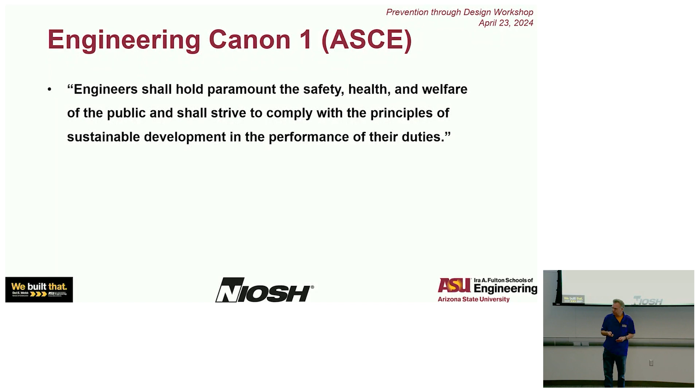If I go back to my title, canned corn, what the heck does canned corn have to do with safety? Well, here we go. Sorry. Hierarchy of control. This relates more to the foundational aspects of the environment and how engineering controls are certainly preferable to administrative controls.

Again, I'm going to use your example, Ed, on the parapet height on top of this building. It's a lot more difficult given the vagaries of human behavior, as we like to talk about it, to say, well, stay away from that 31-inch parapet, rather than building it high enough so that regardless if you're having a good day or a bad day, you're not going to fall over it.

It makes sense, but even the best efforts are sometimes not really dealt with, even though we know the option is really just to add somewhat in the cost, admittedly, but you don't have to worry about it. I've even heard people talk about how the answer to people falling off roofs is not to build proper barriers and engineering control, but just admonish folks to stay away from the edge of the roof.

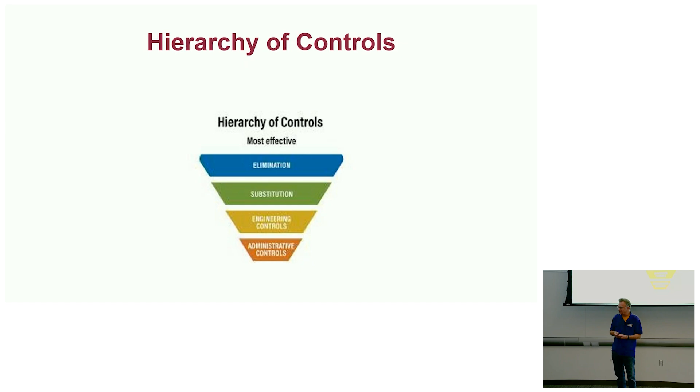This is what I actually hope to do today. This is one man's experience, all right? So part of it is my personal journey that I wanted to share with you as a person who, when I was in graduate school, as you'll see, I was very naive in terms of design issues, right? And if we're smart, we learn. And that's part of what I'm going to show you today. We're going to touch upon some of the common processes, again, based on my experience.

And that's why, again, I'm going to use this word privilege. To be here with people who are going to really create the modern world when I'm long gone is really fantastic. And to be in an institution like Arizona State University, which prides itself, it's kind of funny talking to a U of A guy who's wearing an ASU shirt today, but prides itself on sustainability, right, and innovation. This is an example of taking an idea and incorporating it into one of the best engineering schools in the country.

Okay, so real quickly, you can do the math, but this was back in the 70s. Even as a graduate student, I was given an opportunity to do an internship at a local cannery. I was in northern Illinois, which is a big agricultural area, and there were several food processing plants in northern Illinois, not far from where I went to school in DeKalb. So I was really jazzed about the prospect of working as the safety guy, and I went to the plant and I found out a couple of things really quickly.

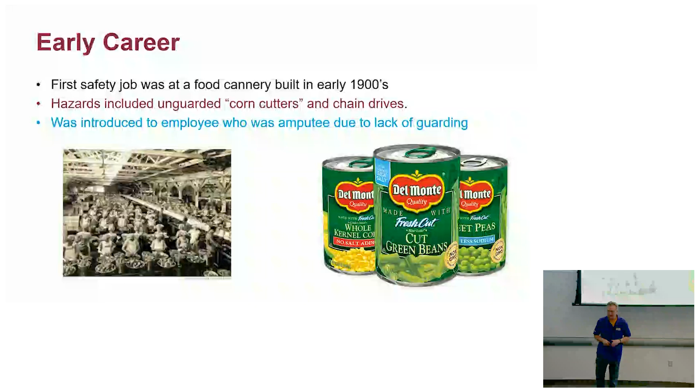And somebody that I didn't know until I arrived at the plant, he came every week to get his check, workers' comp. One leg was cut off because he fell into one of these corn cutters. So even as a young student, I thought, what's going on here? Why wasn't the company more interested in solving the problem than allowing that kind of exposure? So that was a rude awakening. That was really a rude awakening for me. Here's another thing that happened to me.

So my mid-career was I went into healthcare safety. And the local hospital, Tucson Medical Center, had a construction project which required the excavation of a basement parking area next to a new building that was also going up. This required some way of stabilizing the excavation using tiebacks.

And the day dawned like any other. Obviously the job was contracted out for this particular project, but I would routinely at least go out to the site as the safety person and just check it out. So I got a call on my radio in the morning that there was a problem at the site. I went out to the site, and this is what I saw.

The edge of the excavation had sloughed off, and I saw workers with their bare hands, I even have a hard time talking about it, trying to dig their fellow worker out of the dirt. And there's nothing so helpless as when you're seeing somebody who you know is probably going to die and you can't save them. Even though I was not directly involved in the project, what a helpless feeling.

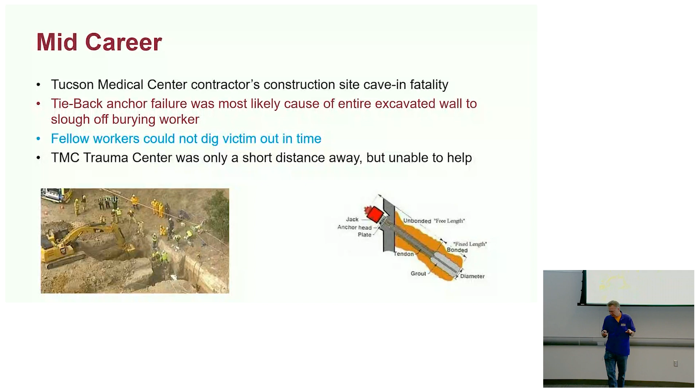So what came out of that was a growing understanding of how critical engineering is to doing the job right. You know, it is a noble profession. Think about that. It can drive you to make the right decisions and push for the kind of things that Dr. Gibson talked about in the first presentation. All right, it gets better.

It gets better. So, later in my career, I became not a miner, but I actually was a safety professional at a smelter. Most people know Arizona is a big copper mining state, and I joined what had been more or less a locally owned copper firm, Magma Copper, that was bought by the Australians in the 90s, and I was involved in several large projects that finally started using prevention through design as part of the project specifications.

Now, they used a pretty rigorous auditing system in general to establish the safety culture, but I must tell you that the pre-planning, which again Ed is very familiar with and an expert in, was really the core towards evaluating the hazards right down to the subcontractor level and validating that you had things in place, including good engineering, to take care of these kind of exposures. I talk about the rod plant upgrade and copper concentrate line dust collection. I'll just talk to you about the latter.

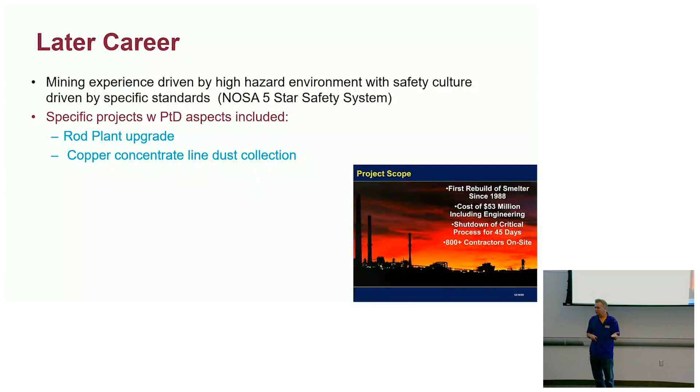So, oh, there's a picture of the rod plant. So, I'll say one thing about safety through design on the rod plant. It's funny, I remember, it's called the palletizer. The palletizer, where this almost pure copper wire that would eventually be made into like telephone lines and things of that nature would be stacked on a pallet, and they put in a very sophisticated interlock system so that if a person got within so many inches of the operating equipment, it would stop, right? Can you imagine the damage this kind of a machine could do to a human body?

So the upgrade included using much more sophisticated controls. And again, all of this was driven by the reality that if there was an accident, you would shut this very, very lucrative line down, hours, days, even months.

Let me talk a little bit about your Australian connection. Because the company was now owned by an outside entity, the Australians' threshold for risk acceptance had moved down, which meant they were very, very progressive, you can use that term, as far as pushing even their American subsidiaries to do this kind of work.

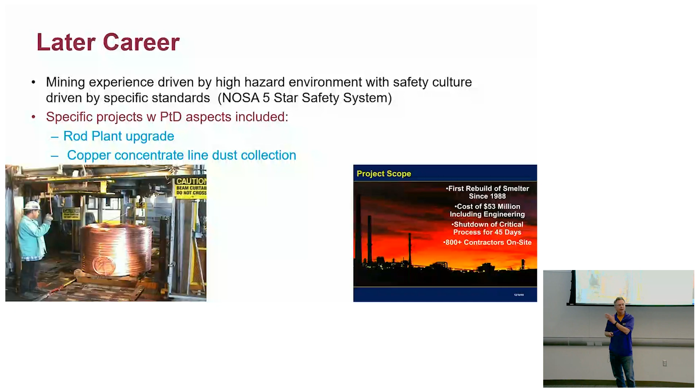Okay, let me talk to you about the wonderful world of astronomy. So, the guy who started out in the cannery, worked his way through other jobs, was asked to do some work with two projects that were being managed by the University of Arizona. You may know that the University of Arizona is really a center for astronomy, and the first project was a solar telescope on the island of Maui on top of Haleakala. And this was direct viewing of the sun. So it was a daytime telescope.

Now, what was really prescient in this particular project was that the engineer at the time was a believer in reading about what was going on in the world of system safety and felt that he could influence the commitment of the project to formalize the PtD approach by using Cliff Ericson's book.

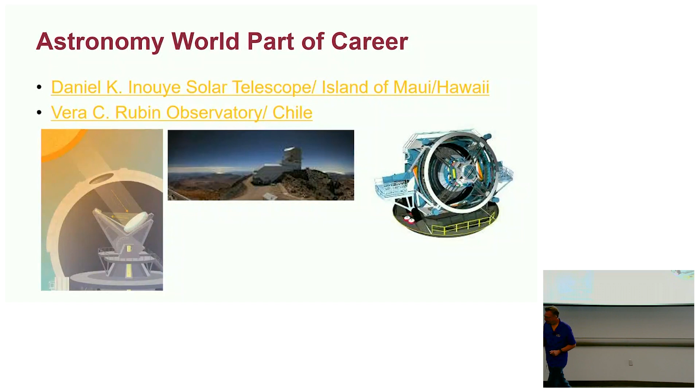One of the early issues was access to the camera. The camera is massive. The camera is as big as an SUV. The camera is the largest electronic camera on Earth, CCD camera, 3.2 gigapixels. So it sucks up data at a phenomenal rate. Just moving the data from a mountaintop in Chile to the rest of the world required not one but two undersea cables.

The access to the camera was looked at very carefully through this prevention through design process. And no ladders. The access platforms are literally on hydraulic mechanisms, right? So when you don't need people to work on the camera, they move away, right? No ladders. When you do need people, they go right to the edge with proper stops, right?

The camera, the electronic rafts, I'm giving you some of the technical aspects, the electronic rafts generate so much heat that the camera has to be water cooled or glycol cooled. So again, the environmental issues are real. I can say this because it's a publicly funded project.

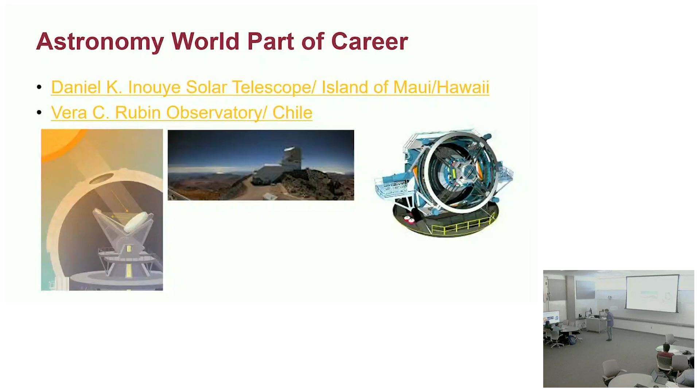But more importantly, and I'm going to show you this, it was 2 years ago, we asked the principals of the project to comment on prevention through design. And I want to play, a couple slides up, some of their comments. And I'd like you to think about it as you hear them, as engineers and designers, the power of people working together for common purpose on not getting people hurt, but also running a project so smoothly that other aspects of the project are enhanced, including communication.

And then I've often asked myself this, does safety culture drive prevention through design, or does prevention through design drive the safety culture? Maybe somebody will have a comment about that after I'm done with the formal.

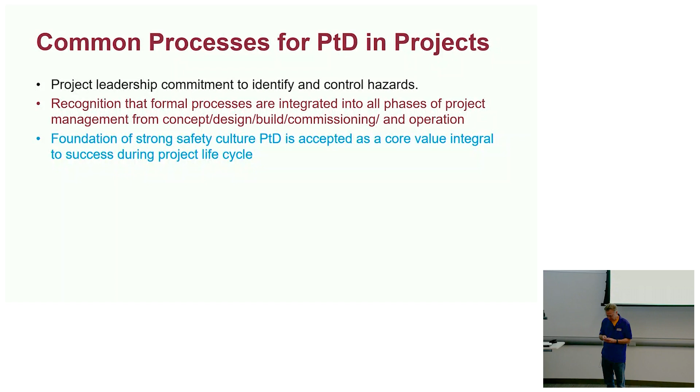So these are the people that I've worked with for pretty close to 10 years. Project manager Victor Krabbendam, Austin Roberts, he's the lead systems engineering entity, and then Chuck Gessner with his then young daughter, safety manager.

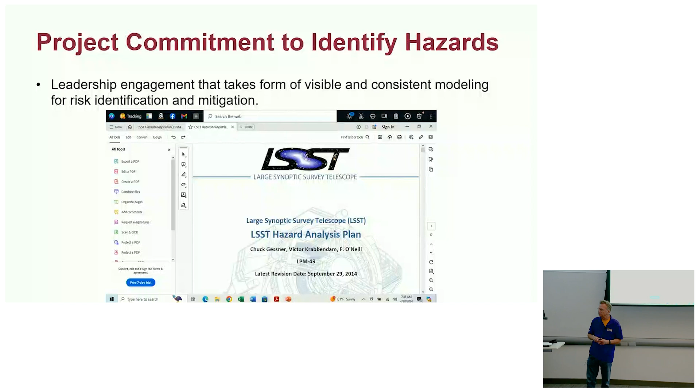Here's, and if somebody wants this documentation, I could probably get it because it is a public project. But again, this is just an example of the hazard analysis plan. So from the get-go, they started the formal process, right, where everybody was involved, all the critical individuals were involved, including the international subcontractors. Everybody had to prove that they had identified the specific hazards, integrated them into their project plan, and then documented it appropriately.

Hazard register. The project is distinguished by a very, very constant and accurate assessment of the hazards for operating the project, but also constructing the project, right? So they've done a magnificent job, in my opinion, of detailing the kinds of things that have to be verified and validated as you get closer to first light. This being done well can help immensely when the project goes into operation. Does that make sense? If it's done up to that point, there's huge benefit for the rest of the 10-year survey.

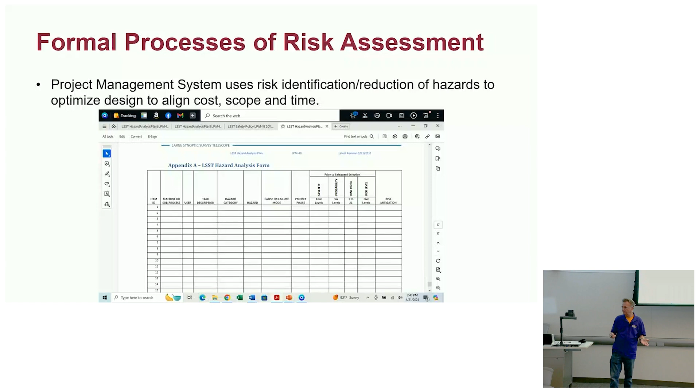Here's an example of the hazard analysis form. It's just the blank. Again, if somebody wants to get a hold of this, we can figure out with David how to do it. They use risk analysis. You've probably seen some variation of this in your work.

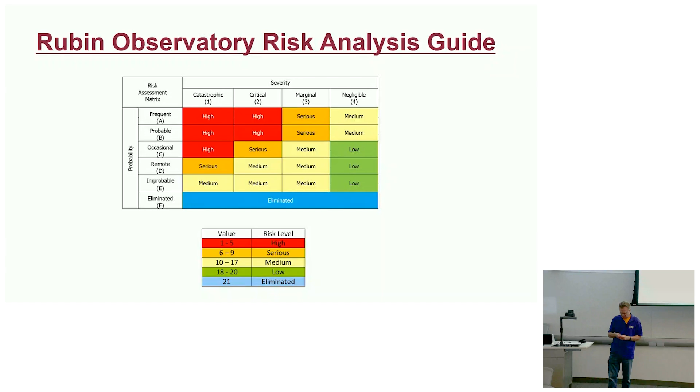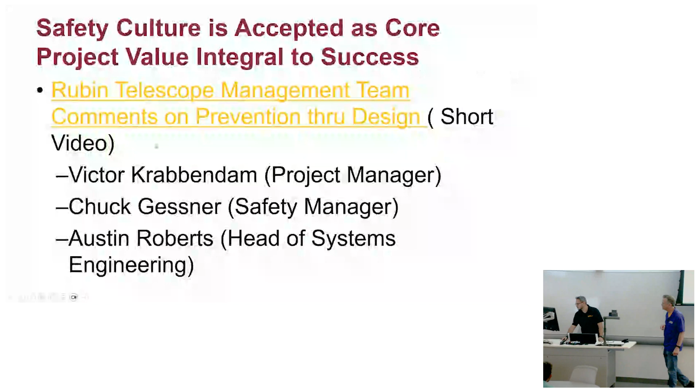Okay, so let's see. Yeah, maybe Daniel can help me out. So we're going to play about 2 or 3 minutes of this. I think it starts at about the 50-second mark. And this was at a workshop.

Okay. Thank you very much, gentlemen. Appreciate that. I'd like to introduce the third member. And what has been the most significant lesson for you as project manager and safety manager for sustaining PtD leadership during this project? I think we can start with Austin. Yeah, I think one of the most important lessons that we've probably learned on this project and looking at it from a systems engineering and technical standpoint is that safety has to be designed in. It's not something that you can do after the fact. You have to have a focus on safety from the very beginning. And the other lesson I would say is it takes continual analysis throughout every stage of the development of a project and constant communication. We always have to be communicating that safety is first. You know, schedules get crunched, people get fatigued, people get tired, and it takes constant communication to kind of remind everyone that safety takes precedence over anything else.

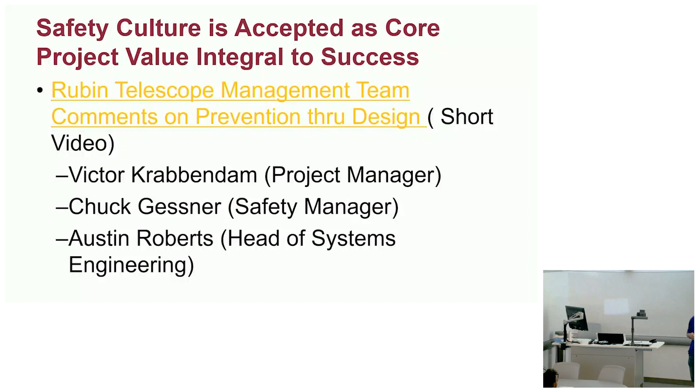So it kind of gives you a flavor of the kind of leadership that it really takes to make this, even in, admittedly, a very complex project work. Driven from the top, but you have a process to support and validate how this actually happens. Okay, just a couple of other things and then I'm going to wrap it up.

PtD is fully integrated into the project management for each phase. Early risk analysis is the key. Besides the Ericsson inspiration, they use MilStd, Military Standard 882, which is the system safety guidance. Engineers and others should drive the process, right? Own the process.

And don't leave out the major equipment contractors. And I think to Ed's earlier point, don't leave out the maintenance people who are going to have to be dealing with what you designed and what was actually ultimately built. And then effective communication to accurately track implementation. Because if somebody asks the question, well, why? You will have the record leading up to, including the hardware, the installation, the maintenance, all of that will be part of it.

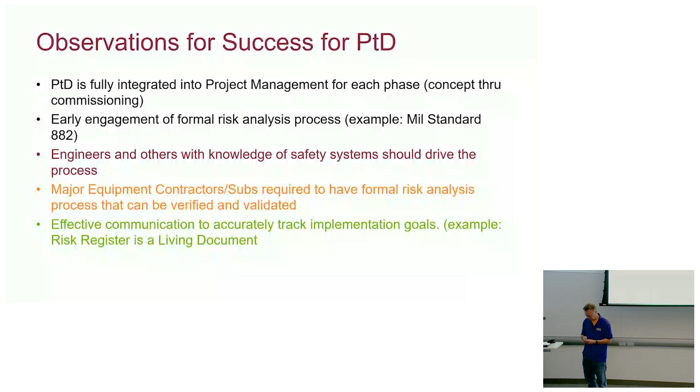And I don't have an easy answer to the Boeing issue, but the reality is there are billions and billions of dollars being contemplated because of decisions that were made either long-term, short-term. And we'll see how that unfolds. But that's why the engineering is so critical. And these skills really do enhance the ability to make those decisions.